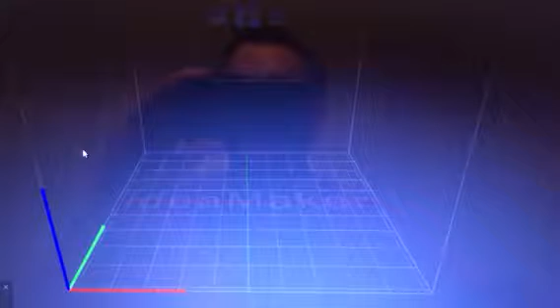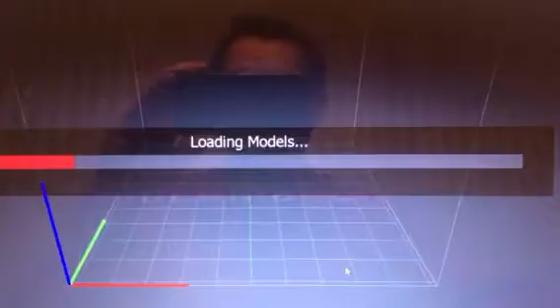Mainly to the advanced adjustments in your slicer. So what we're going to do here is I'm just going to drop in a benchy, just so everybody knows what a benchy is. If you're running a slicer, you kind of have to have a 3D printer, and you should probably know what a benchy is.

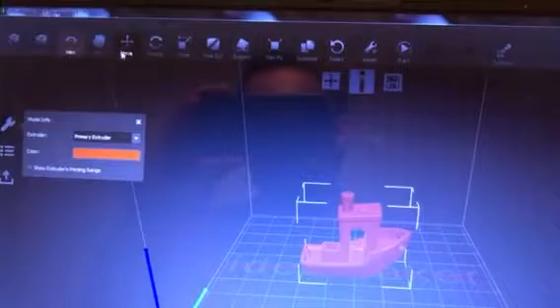Now, most of it is pretty much the same. You bring stuff in, you can move it, click the move, and anytime you move something, you should come over here and click on platform just to make sure that it sets back down on the platform.

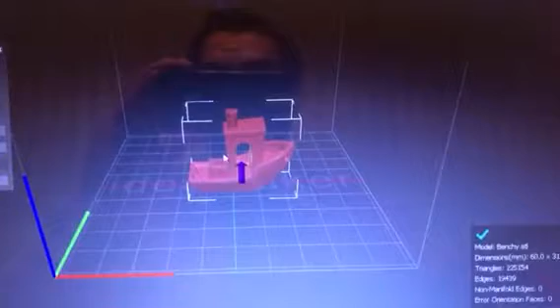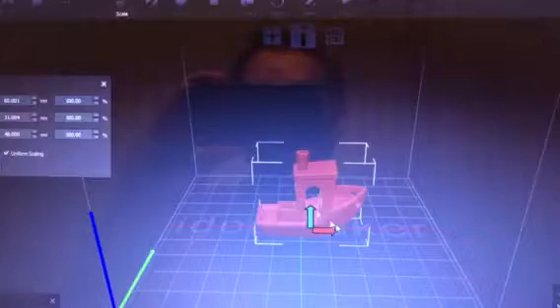I have noticed that since they updated it, I haven't needed to move my models down and adjust from where they say it's on the platform to actually being on the platform. I haven't had to mess with that since they updated it. So that's a plus. You've got rotate here. You can actually scale the size of your model, make it bigger and smaller. You just click on it, bigger, smaller. Pretty simple.

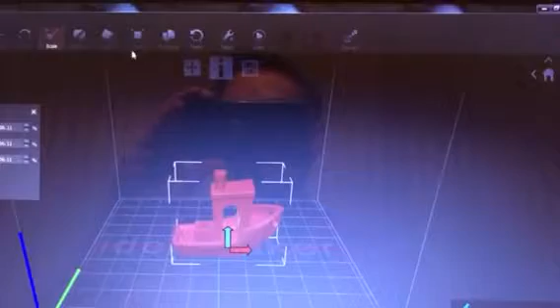And then you can do free cuts. Basically you can take a big model, drop it in, slice it so that it fits your bed, and then save the pieces and be able to print it in multiple pieces to glue together later. That feature was there before, but I'm just kind of giving you guys a quick run through of the whole program.

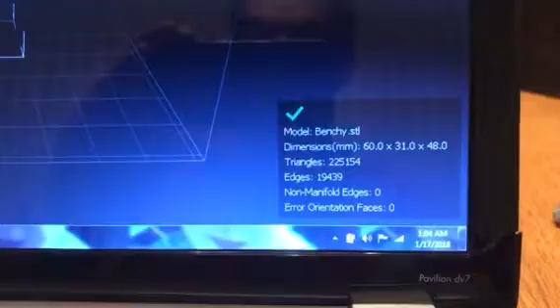There's reset, so basically you just click it and that goes back to exactly how it was dropped in. There's a repair feature, and usually right down here in the corner it'll come up with a little warning to tell you whether there's non-manifold edges or whatever. It'll tell you there's something wrong with the model, and you can click on that and it'll do its best to repair it.

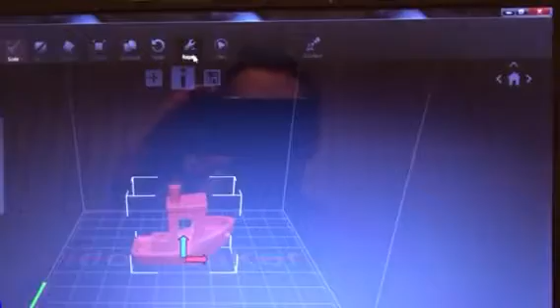I have had a couple of models that I've dropped in that weren't able to solve, and there was some weird stuff going on. I mean, it would have been printable, but there would have been some weird stuff going on, so I just nixed them and did something different to fix it.

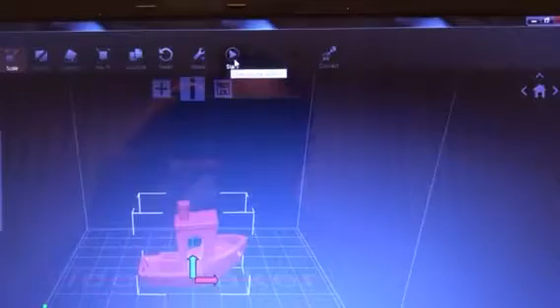But then of course you just go in here to hit the play button and go to slice, and then you've got your template set up. If you want to adjust it, you go to edit, and then it will bring up this window here. I was just printing something that I wanted pretty solid, so I had it at 50% with 5 outer shells to make the outer shells stronger. Normally I run 4 shells, and I usually run at 20% infill. That's just pretty standard on how I run it.

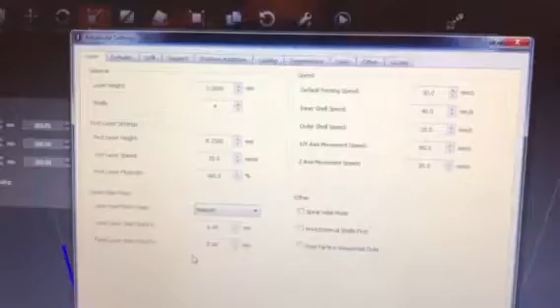You can go to advanced, and when you come into advanced, there's some really cool new features that I'm really glad they added in here. One of them being in the temperature setting. You can come here, and this is where you would set the temperature for your extruder, the temperature for your bed. But now, with a lot of these bigger printers coming out, like the CR10 and the Tevo and stuff like that, they've actually got this set up to where when you're running PLA, you don't actually have to have a heated bed.

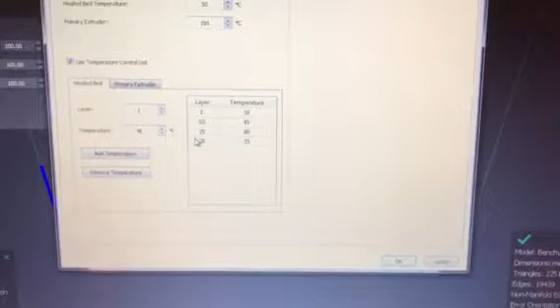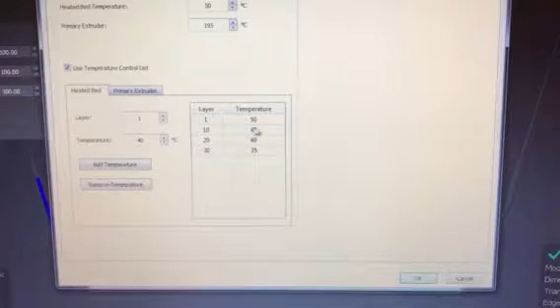It is nice to have a heated bed, but with a big printer like that, it can suck down a lot of power. So basically what they've done here is they put this in to where at different layer heights you can actually drop the temperature of your bed. So once you've got good adhesion and you know it's not going to be warping on you, I've just got it set up here to where it steps down and drops to 35C, and it just keeps printing along. I think that's awesome. That's a killer feature. I really appreciate them putting that in for us.

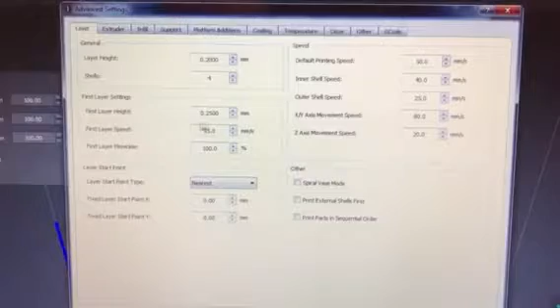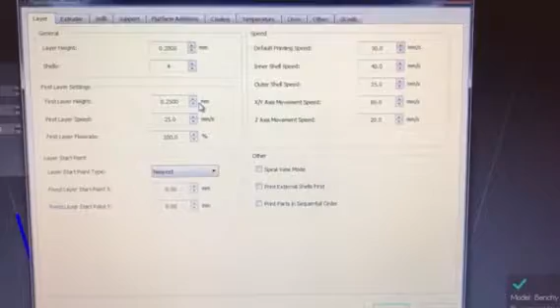And then they did kind of change the layout a little bit, and I haven't quite figured out -- there were some other options that they kind of deleted that I'm still trying to figure out exactly how to change. Like there was one where the path wouldn't go through open holes. So if you were printing something that had screw holes or whatever that needed to go through it, your print path wouldn't go through it at all. It looks like they deleted that completely, which is fine, that's not a huge deal. But everything else is pretty much the same, just laid out a little bit differently.

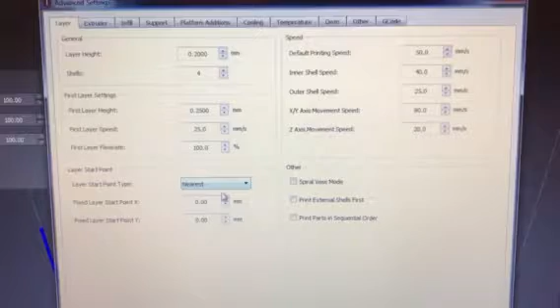But on my little Ender, that thing is just a great little printer, and it works on just about any setting I throw at it. It'll still print decent. So I really haven't found anything that messes that thing up too much.

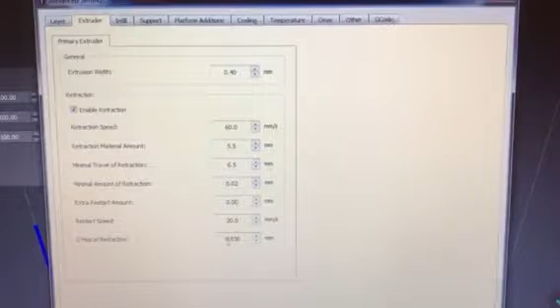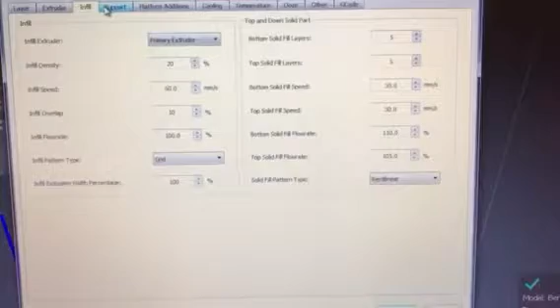I've got mine set at enable retraction, with retraction speed at 60 millimeters a second and retraction amount at 5.5 millimeters. That's just so you don't get stringing anywhere it's jumping an open hole. The stringing isn't a big deal, but I don't like the looks of it when you're printing something and you've got a bunch of strings going across your print. It just looks gross, so I like pretty fast retraction speeds and retracting quite a bit so I don't get that.

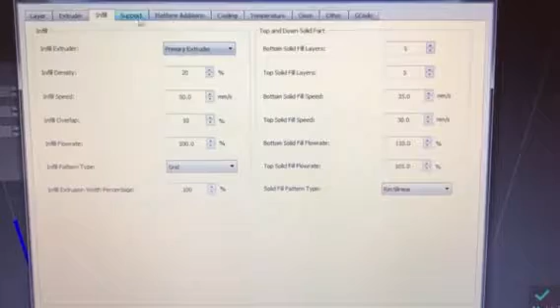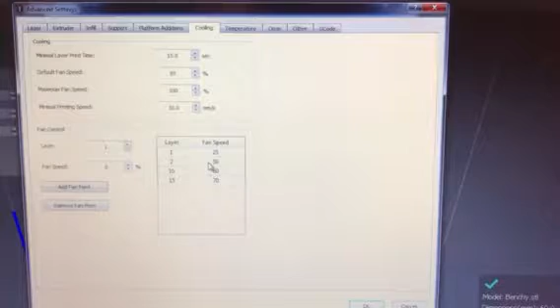Infill density is still pretty standard. They kind of did the same thing with the cooling setup for your parts fan, which the Ender doesn't have from the factory, but I added one in, so now I'm actually able to use this setting, which I was never able to use before. It's a nice feature.

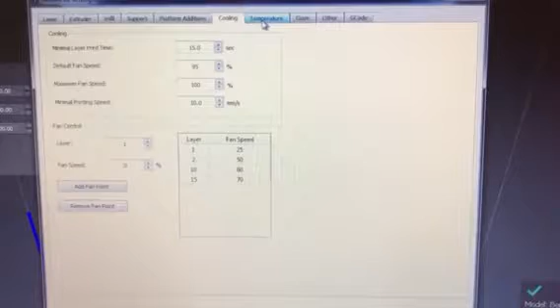I like being able to set my parts cooling fan - it does actually help the Ender quite a bit. If you have an Ender and you're going to do anything to it, I'd suggest the first thing you do is put a parts cooling fan on it. I do have a video showing how to install one, and it's super simple. You can click back through my videos and find that.

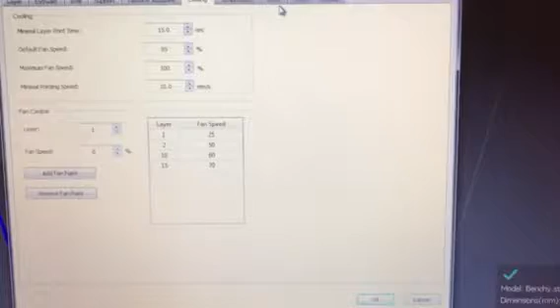I just downloaded a file off of Thingiverse for the Fang parts cooler. I think it looks cool, and it was something I was able to throw on here, print out real quick, and then add the fan in.

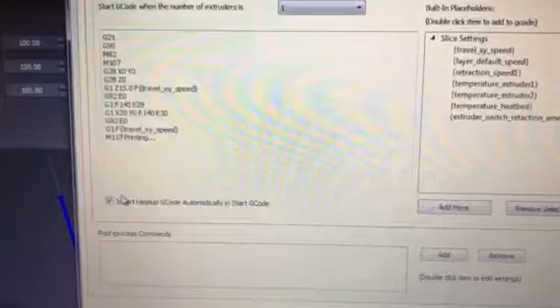Another nice thing they have is some options for your start G-code and end G-code. If you have a heated bed, the first time you set this up, whether you ran the last version of Ideamaker or are just coming into it, you need to go to the G-code and click the box for the heat up automatic start G-code. Otherwise the heated bed isn't going to heat up for you. So make sure that's added.

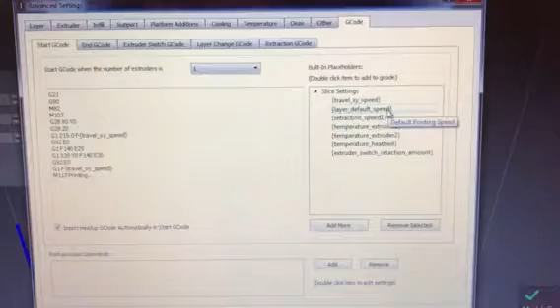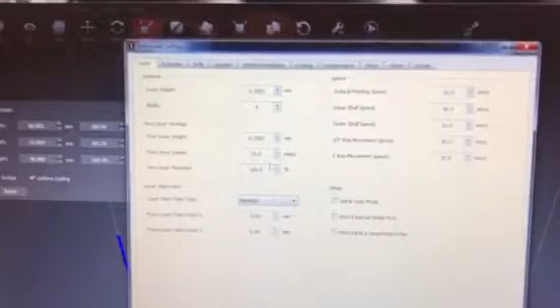Other than that, it's pretty much the same layout. This is the 3.0.5 version. They just released this on December 18th, so I just happened to stumble upon it and downloaded it, and I'm liking it. It works really good, guys.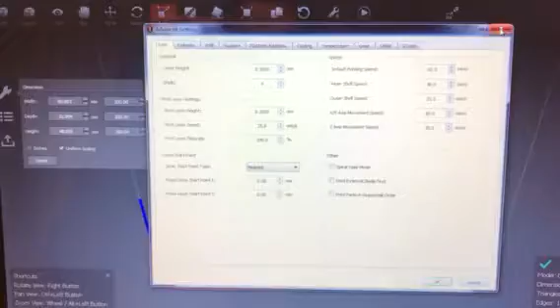If you've never used Ideamaker before, I can't say enough about this program. For a free program, it works great, and there's a ton of good options in here. If you're on the fence about which one to use, I like this one a lot, and it's pretty fast - so hit slice...

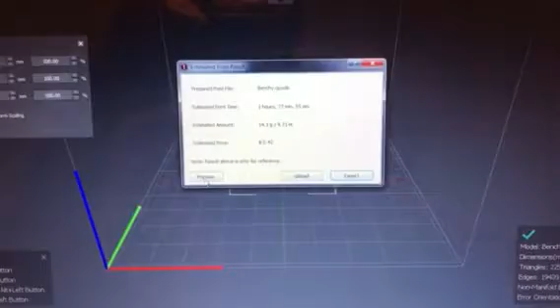Bam, sliced. And trust me guys, this is on a crappy computer - this computer is pretty much junk, but it does actually slice pretty fast.

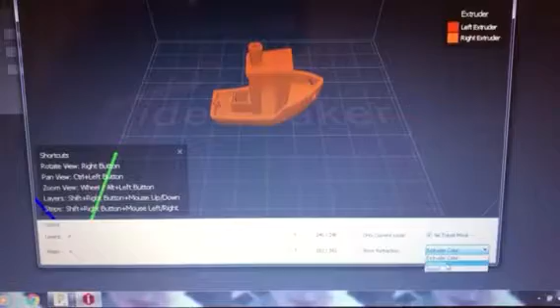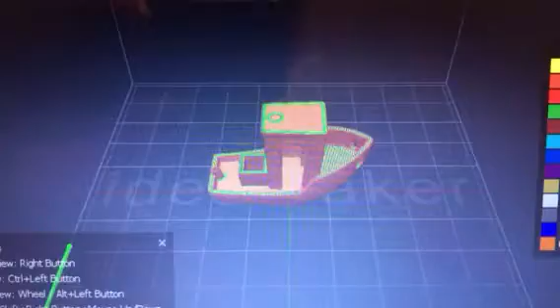There's some other stuff they added too. When you go to your preview slice, you can click on structure. They had this before, but now there's a cool little window that tells you what every individual color means as you go through the slice. So as you cut this thing down, you've got your inner shells, and your outer shells are going to be that maroon color - the inner shells are green.

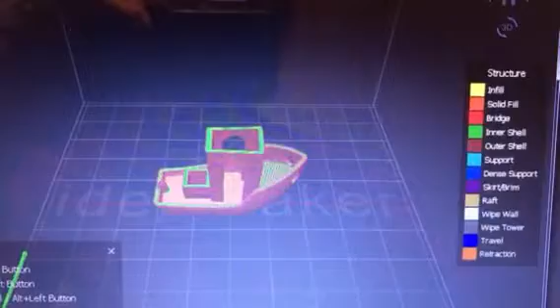Any bridging - that's basically printing over the top of an open space, your infill or whatever - the first layer over the top of your infill I believe is the bridge, and that'll come up red. You'll see that down towards the bottom.

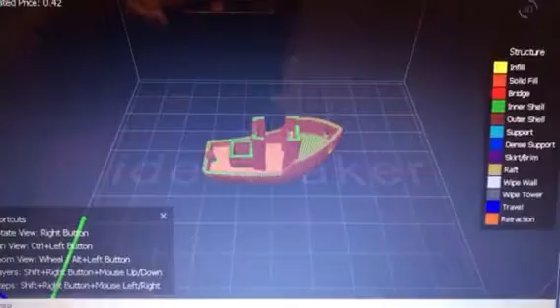Your supports come in a different color, which is great. It just makes it a lot more visually appealing as you slice this down and really be able to look at what your slice is doing.

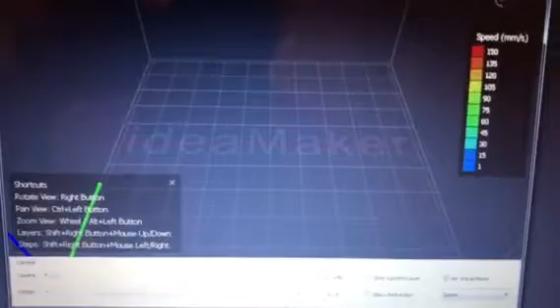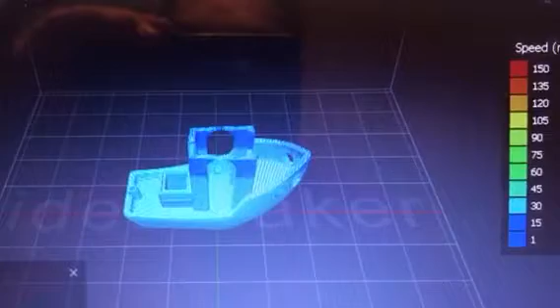And then there's also, under structure, a speed option. As you come up with this, it's going to show you in color how fast you're actually printing, how fast you have it set to print. You can see the infill is a little bit more on the green side, because I print my infill pretty fast - almost 60 millimeters a second.

So yeah, this is the new Ideamaker, and those are just some of the features they've added in - some of the stuff I've come across that I noticed was different.

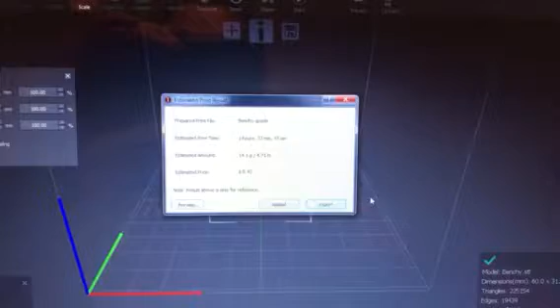If you haven't tried it yet, I suggest it. It's a great program, and like I said, that new heated bed temperature adjustment is great. If you're running a big printer, that's a big plus.